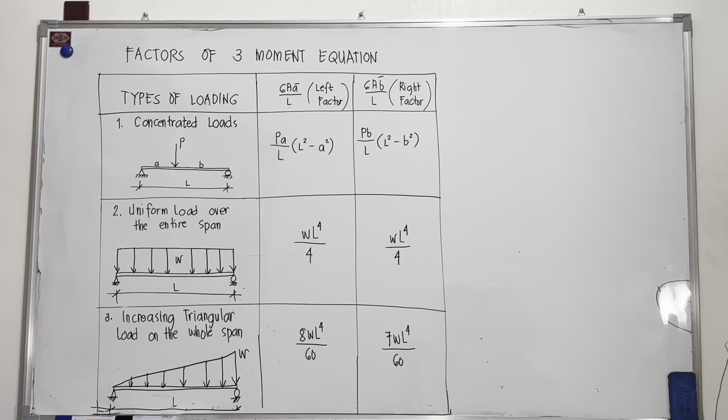So for today's topic, ang pag-uusapan natin ay ang factors of the three-moment equation. So we have the different types of loading. Tatlo lang po muna yung nandito pero sa talagang reference book, mga 6 to 7. Mamaya ipakita natin yung iba, no?

So ito lang muna tatlo yung ating mga types of loading: concentrated loads, uniform load over the entire span, and the increasing triangular load on the whole span. So for the concentrated load, meron tayong left factor na tinatawag na 6AA bar over L, at right factor na 6AB bar over L. Yung A bar represents the centroid from the left support, at yung B bar represents the centroid from the right support.

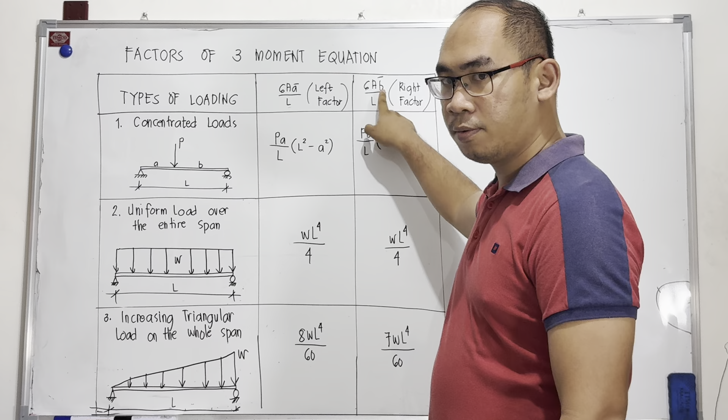So like for example, we have here the load, no? Tapos nagkaroon tayo ng ating moment diagram by parts. So let's say nagkaroon siya ng moment diagram by parts, at yan yung naging moment diagram by parts.

So kung pagka sinabi natin 6AA bar over L, lahat ng area at moment nito, yung A represents the area, yung A bar naman is moment doon sa left support. So ito yung AA bar 1, tapos ito yung magiging AA bar 2. While yung 6 naman is constant value, at yung L naman po is the length of the span.

So magtataka kayo, saan ba galing yan? Saka na natin pag-usapan kung saan galing yung mga yan. Pero isa sa pinaka kailangan kasing isolve pagka magko-compute tayo ng three-moment equation ay itong factors to the left and right. So mahalaga po na makompute yan. Kaya bago tayo pumunta dun sa tinatawag na three-moment equation, kailangan mapag-usapan muna natin ito, no?

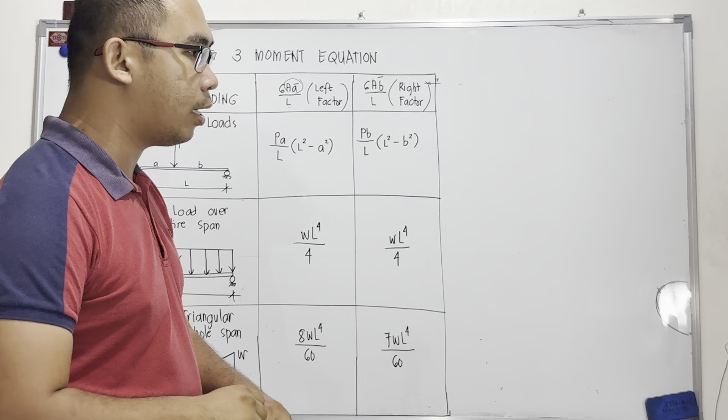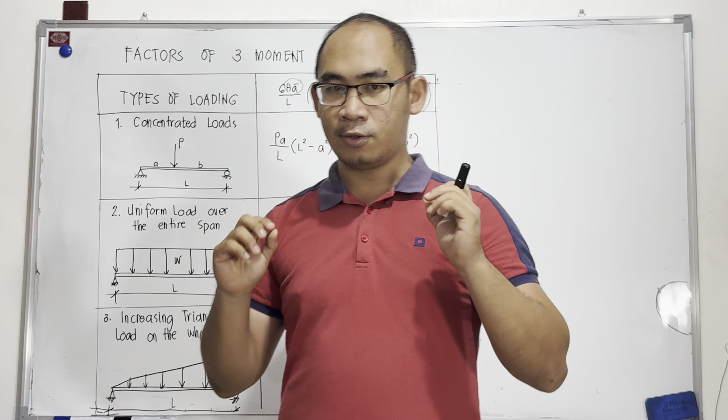So let us try to discuss what are the types of loading. So like for example, kung mapapansin niyo, lahat po ito ay simply supported. Kasi kung kahit ang loading niya ay naka-fix, ina-assume based dun sa derivation ng ating three-moment equation na dapat lahat ng support ay simply supported.

So, discuss muna natin yung concentrated loads. Let's say we have here the concentrated load number 1. If we have here concentrated load P and a distance of A and B, so meron tayong support dyan. So, what are the reactions po na meron tayo dito?

So, dito ay naka-variable siya, no? Baka kasi mamaya ay hindi kayo sanay sa mga variable. So that is PA. Pagka mag-summation of moment tayo sa A is equal to 0, that is P times A. Let's say this is RB, minus RB times the total length of the span is L, is equal to 0. So RB now is equal to PA over L.

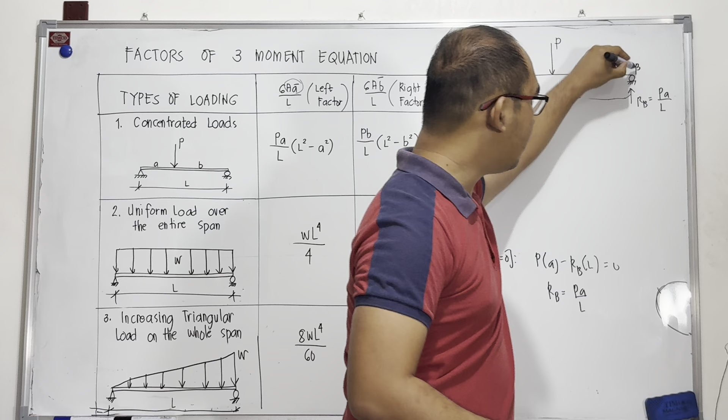While the other one naman po ay kung mag-moment naman tayo sa B, let's say this is A and this is B. Summation ng moment naman po tayo sa B is equal to 0: PB minus RA times L is equal to 0. So RA now is equal to PB over L. So those are the reactions po na mako-compute po natin.

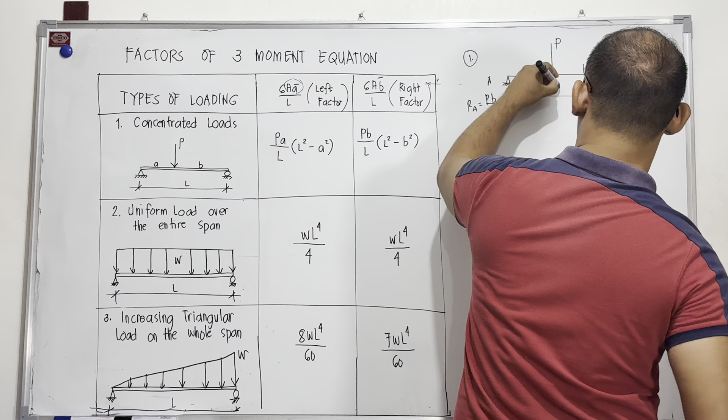Okay, so let us solve for 6AA bar over L. Parang area moment lang rin to. We have to draw first the moment diagram by parts. So let's say this is the moment diagram by parts. Tapos lagyan natin itong P. So saan tayo magpi-fix? Kung kailangan natin ay 6AA bar over L, doon na tayo mag-fix sa point A, mas madali. Kung sa A tayo mag-fix, magiging ganito po siya.

So yung ating P, multiply natin sa A para maging moment siya kung moment diagram by parts natin, so the distance here is PA. While on the other hand, ito po ay 6AA bar over L. For 6AA bar over L, sige, mamaya na yung 6AA bar. Ito ay nag-fix tayo at A. Sa taas naman po, PA over L times L, magiging PA lang rin po yan. So this is positive PA, at sa baba ay negative PA. So dapat parehas po yung quantity nito.

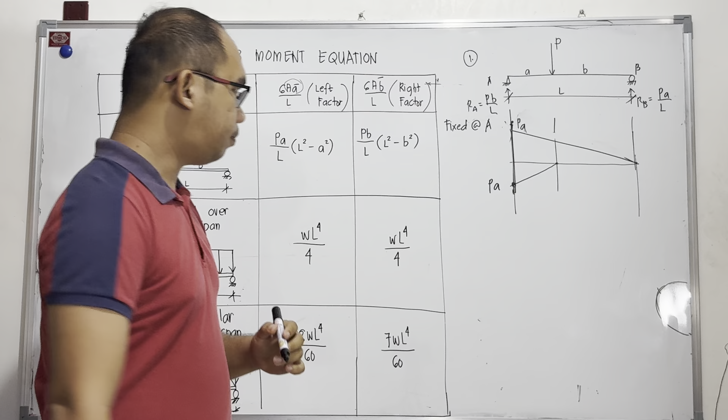Okay, so to solve for 6AA bar over L - saan ba equal yung 6AA bar over L? Paliwanag lang po natin. Ang 6AA bar over L ay equal lang rin sa 6 over the length of the span multiply by area moment with reference doon sa left support.

Saan ba ang left support? Ito po. So ibig sabihin area moment natin, sila ang reference doon sa left support. Okay, so for the first one, what is the area of this first figure? O yung nasa taas na figure. So that is 1/2 ng base times height, so PA times L over 2.

Multiply by the centroid. Ilan po yung centroid nito? Distance hanggang doon, so that is L over 3. Minus yung area naman po nung nasa baba, PA times A, so PA times A over 2, 1/2 ng base times height. Tapos yung centroid naman, mula dito papunta doon sa A, from the left support, so that is A over 3.

Okay, then let us simplify. So this 6AA bar over L will give us PA L squared over 6 minus PA cube over 6. Okay, then may mapapansin tayo, meron tayong pwedeng ma-factor. So pwede nating ma-factor ay yung PA over... PA times L over 2 times L over 3.

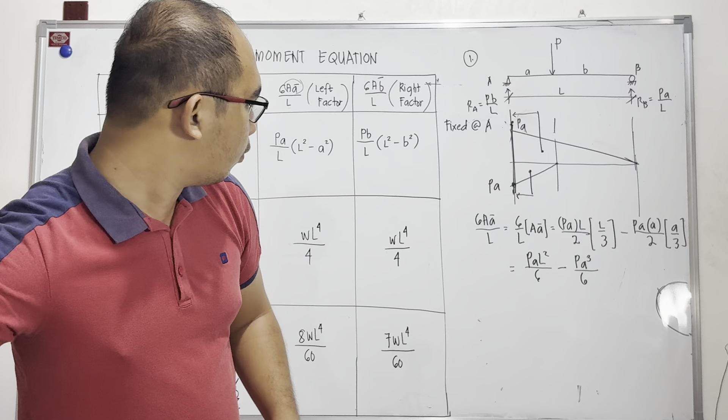Okay, sorry, meron pala tayong nakalimutan. So that is the area moment, pero nakalimutan kong ilagay yung 6 over L, no? So 6 over L, lagay po muna natin yung 6 over L dito. Yan. So 6AA bar over L, ito yung 6AA bar over L, is equal to 6 over L ng AA bar.

Kumbaga, itong value na to, yan po yung value ng area moment or yung AA bar, area moment from the left support. Yan po yun. So nakalimutan ko lang ilagay yung 6 over length ng span. Okay, so yun po yan.

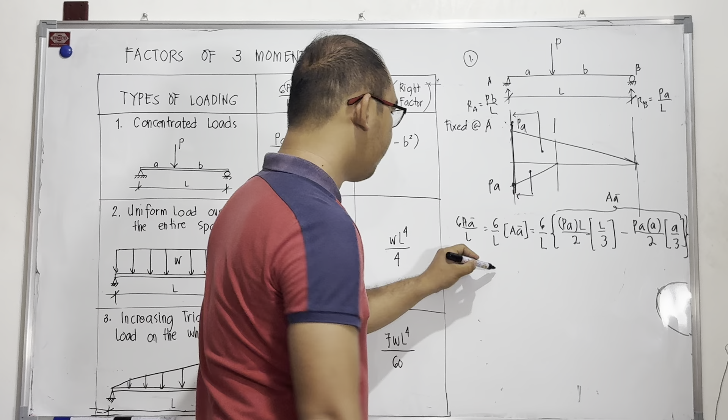So magiging, let us try to simplify. So if we are going to simplify this one, that becomes 6 over L multiply by - ano yung monomial na pwede nating i-factor. I think yung ating PA over 6, yung P common sa kanila, meron tayong P na pwedeng i-factor. Tapos yung A, pwedeng i-factor din. Over 2 times 3 becomes 6.

So that is 6, or sige, so simplify lang muna natin. PAL squared over 6 minus PA cube over 6. And simplify, so 6 over L. Ano po yung pwedeng i-factor? PA over 6 multiply by L squared minus A squared.

Okay, tapos try nating simplify, magka-cancel to. So ang matitira ay PA over L times L squared minus A squared. So ito na po yung formula para sa factors to the left nung ating concentrated load. Okay, so ganyan po yung magiging formula natin.

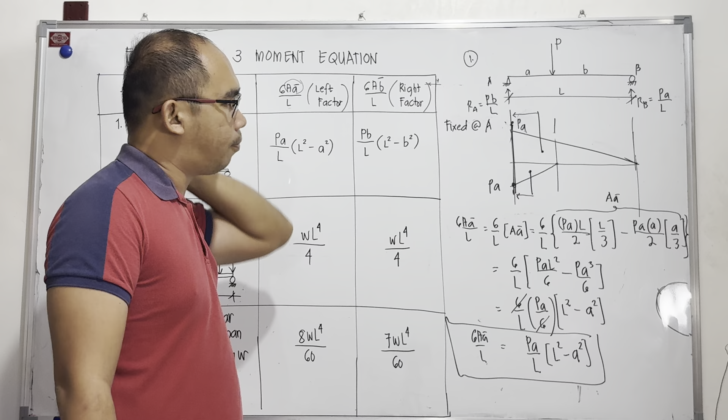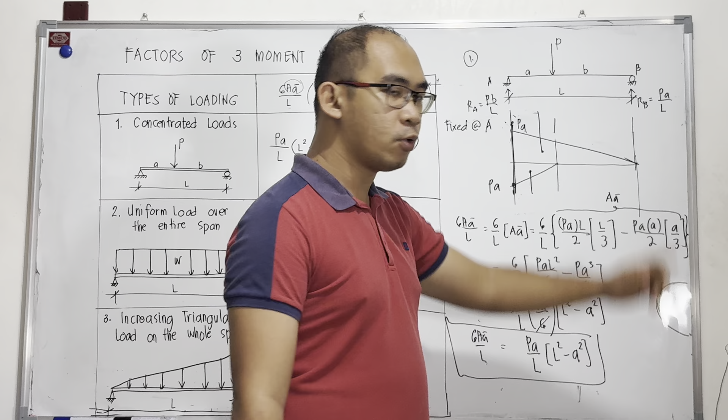So in case man, yung ating factors to the right, pwede naman na ganito pa rin yung moment diagram by parts niya. Tapos yung distance lang ng ating moment ang mapapalitan. So doon na tayo magre-reference sa right, no? You can try that, pero mas prefer ko kasi mag-change ng fix doon sa right support kasi mas madaling mag-compute pagka nandun sa right support.

So let's try the 6AB bar. So again, this is the 6AA bar over L or yung factors to the left ng ating moment ng ating factors to the left ng ating given load, no? So yan po yung given load natin. So yung factors to the left natin is yung kanina.

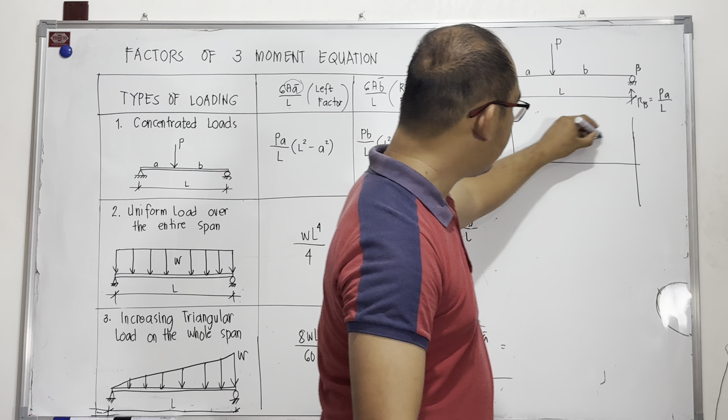So let's try naman kapag doon tayo sa right, magmo-moment or mag-fix, so this is PB. So this becomes PB over L. So ito naman ay magiging PB. Tapos ito naman po ay magiging P times B is PB.

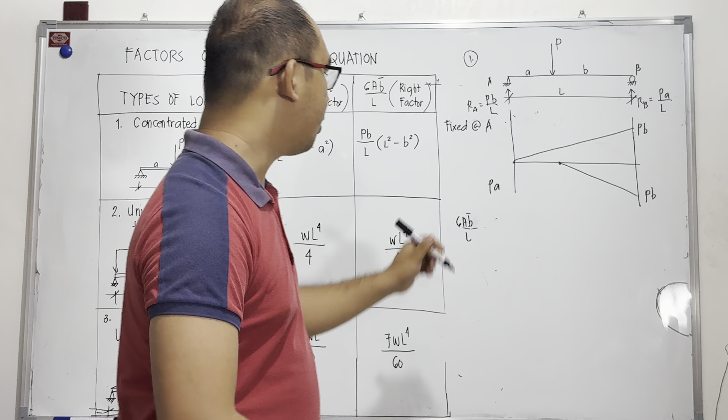Okay, so sa 6AB bar over L, may napansin ba kayo? Parang kamukha siya nung nasa una kanina. Yung A nga lang napalitan ng B. Okay, so let's try - 6 over L multiply by area moment, so area. So PB times length L over 2. Ayan po yung area niya.

Tapos mag-moment tayo ngayon dun sa B. So ano yung distance? Sa right support, so that is L over 3. Minus yung atin naman pong PB times B over 2. Sorry, so tapos multiply by B over 3. Okay, so let us try to simplify.

So PB over 6, or pwede nating i-factor ang PB over 6, times PB over 6 multiply by... So na-factor na tong mga PB, so pwede na natin, nakalabas na yan, pati yung 6 kasi 2 times 3. So ang matitira na lang ay L squared minus B squared. Okay, so to simplify that one, magka-cancel po yan. So magiging formula ay PB over L times L squared minus B squared.

Madaling mapalabas yung formula na PB over L times L squared minus B squared. Sir, pwede ba yung kaninang figure na lang tapos hindi na namin babaguhin yung distance? Yes, pwede rin naman po yun. Tapos i-simplify niya, magiging ganito lang rin yung sagot. Yung nga lang, baka mas mahaba yung solution kung hindi ka mag-change ng fix. Ito kasi, fix sa B na to. Doon na tayo sa right support nag-fix. Okay? So, you try it.

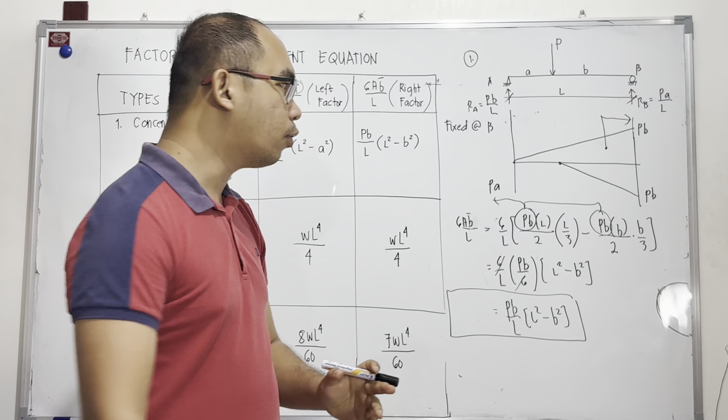Kung mapapalabas niyo itong ganitong formula pa rin, no? So meron na, ibig sabihin, napatunayan na natin yung formula na itong left factor ay PA over L times L squared minus A squared. Tapos pagdating naman sa right support, yung A lang po, mapapalitan lang siya ng B. Okay?

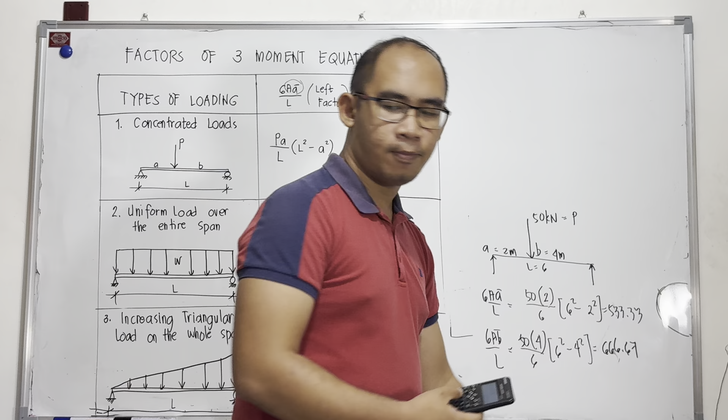ito po ay magiging 6 squared minus 2 squared. So, times 50 times 2 over 6. So, ang magiging value nito ay 533.33. Tsaka yung 50 times 4 over 6 times 6 squared minus 4 squared, so 666.67. So, yan na po yung value niya, no? Yung magiging sagot po sa ating problem pagka given tayo ng concentrated load tapos with distance A and B.

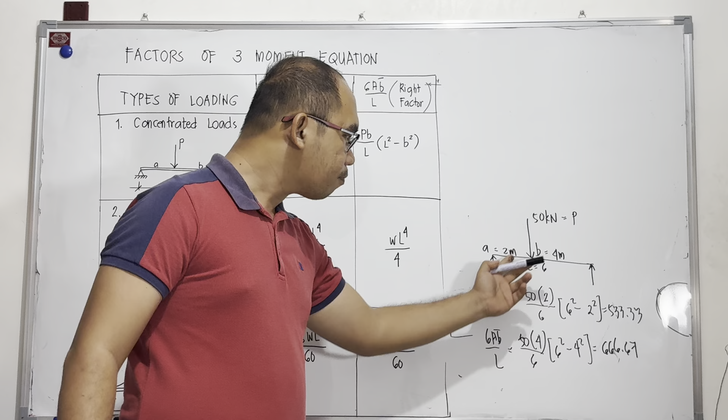Let's try to derive the another types of loading. We have the uniform load. So, paano naman po yung formula kapag yan ay uniform load W? Okay?

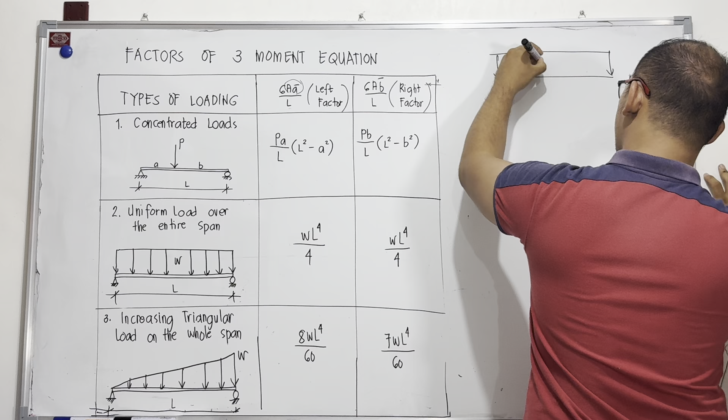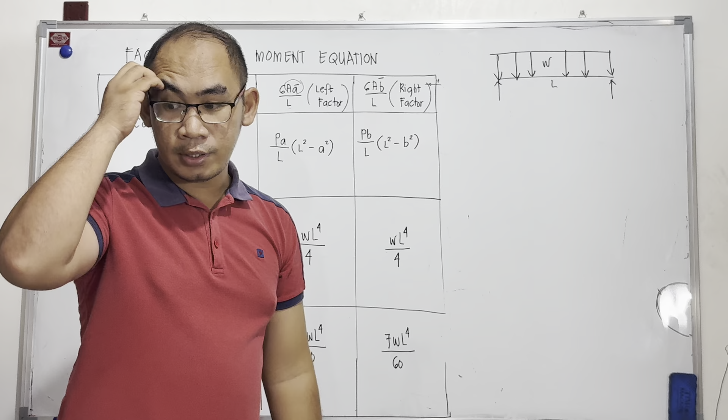So, let's try to compute the reactions. Distance L. Okay, to compute for the reactions, pwede naman yung pag-compute natin na conventional sa reactions. Pero ano ba yung area nito, or yung ating total load force? The total load force is WL. Ibig sabihin yung WL, kung yan ay symmetrical, paghahatian lang yan ng dalawang reactions—yung reaction sa left support at saka yung reaction sa right support. So, this is WL over 2.

Okay, kung gusto nyong ma-check by the conventional reactions, pwede rin po. So, summation ng moment sa A is equal to 0. So, WL times L over 2, area times moment, tapos is equal to reaction sa B times L. And so, magka-cancel lang yung L. So, reaction sa B becomes WL over 2. Yun lang rin po yun.

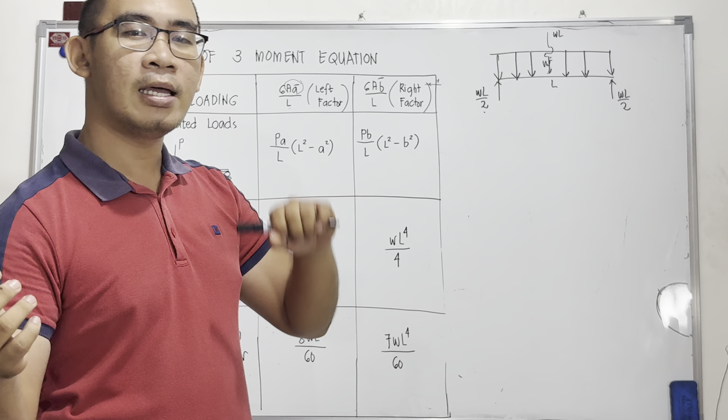No? Then, try nyo mag-moment dun sa kabila, WL over 2 lang rin po, since yan po ay symmetrical. So, meaning, kung yan ay symmetrical, ina-expect natin na yung factors to the left and right rin po niyan ay parehas rin. Yun po ang isang condition ng factors to the left and factors to the right. Once na symmetrical yung ating loading, ang kanilang factors ng left and right ay parehas lang.

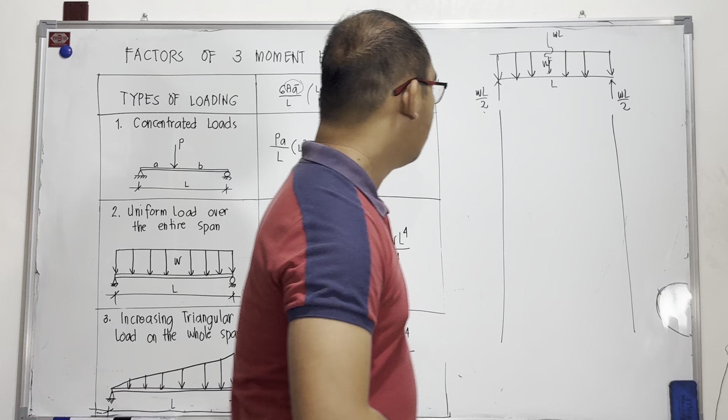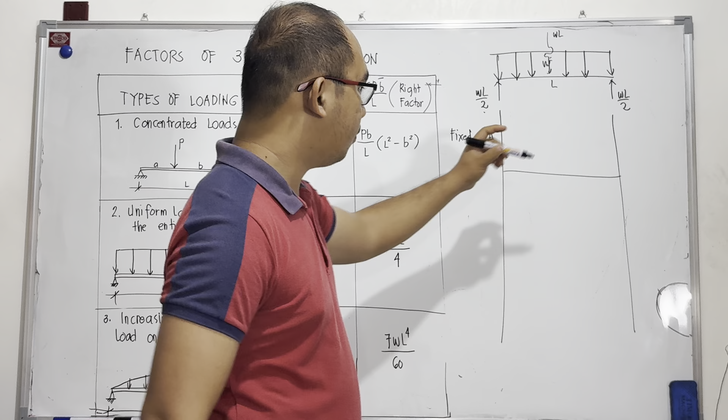Okay, so let's try to derive this formula. Okay, so let's try to fix at A. Okay, so if we're going to fix at A, yung ating concentrated load na WL over 2 or yung reaction na WL over 2 times L becomes WL squared over 2. Tapos yung atin naman pong uniform load na W ang load.

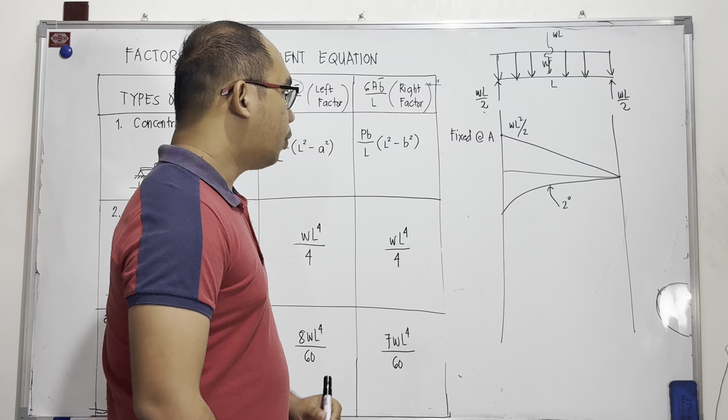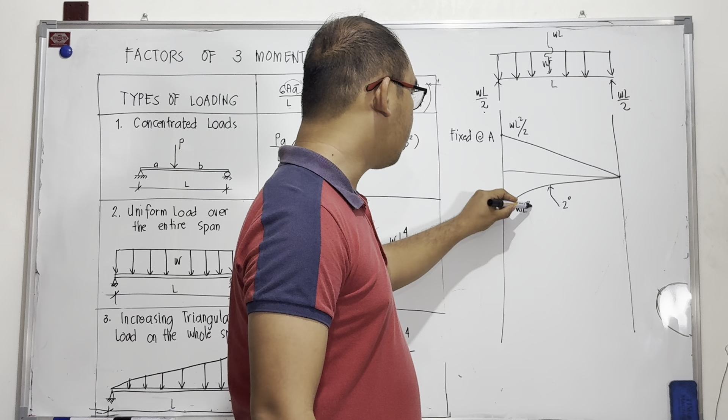So pag i-moment naman po natin yan, magiging second degree, kasi 0 degree yon, so ito na po ay magiging second degree. So what is the moment of that uniform load? WL, so that is WL times L over 2, so magiging WL squared over 2. So again, paano ito nakuha? WL times L over 2, minoment po natin yung ating uniform load. Ito naman po paano nakuha? WL over 2 multiply by the distance ng L, so magiging WL squared over 2 lang rin po.

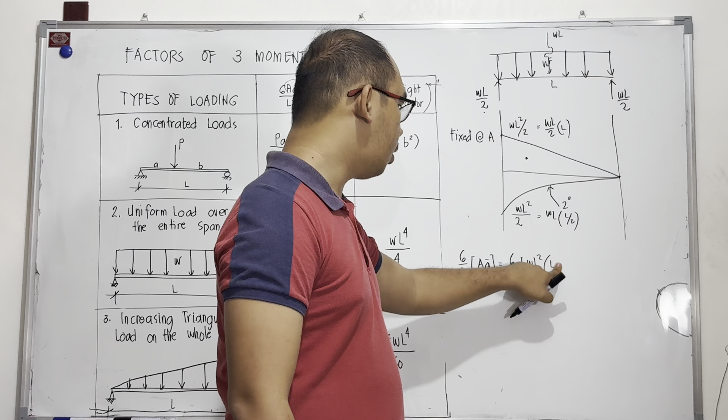Okay? So for the 6AA bar over L, or gawin na lang natin 6 over L para hindi tayo, mas madali kung ganito na lang gagawin natin, 6 over L AA bar. Okay? So dito makikita natin na kailangang ihiwalay yung length ng span multiply by the area moment from the left support. What is the area nung nasa taas? So that is WL squared over 2 multiply by the length, so that is length L.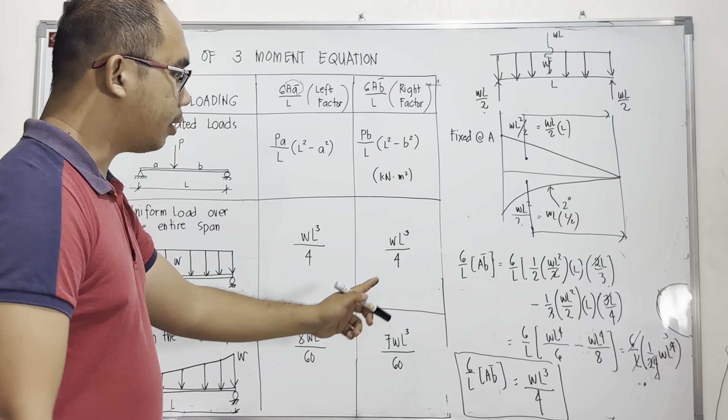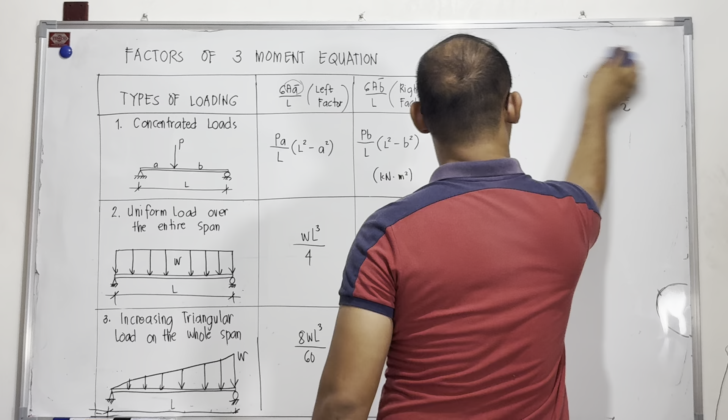So let's try to illustrate the uniform load. For example, we have a load here of 30 kN per meter. Then the length of that is 6 meters.

So to compute for the factors, we have 6AA bar over L. If we are asked to find the left factors and the right factors, it's simple, we just substitute into the formula. So 6AA bar over L is equal to WL cube over 4. This is W and this is L.

So that is 30 multiplied by the length 6 cube over 4. What would be the answer there? So 30 times 6 cube over 4 is 1620, and the unit is kilonewton meter squared. And similar for 6AB bar over L, it's also 1620 kilonewton meter squared.

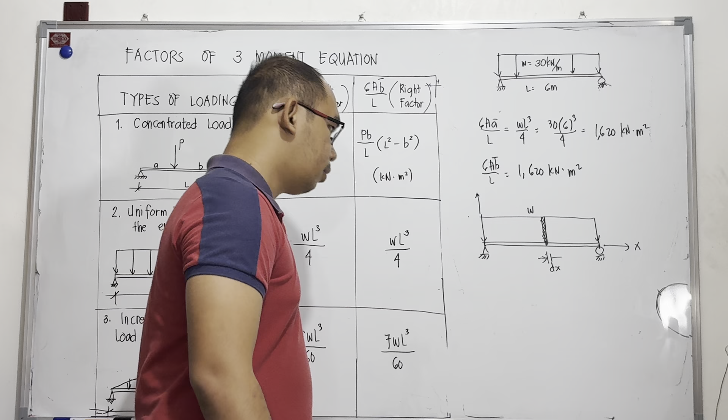So to solve the 6AA bar over L, this is a concentrated load if that is a strip. And the load of that strip, let's say that is dP. Then the height of that strip, let's say that is y. So what is the 6AA bar over L of our concentrated load like this? The formula for that is PA over L times L squared minus a squared.

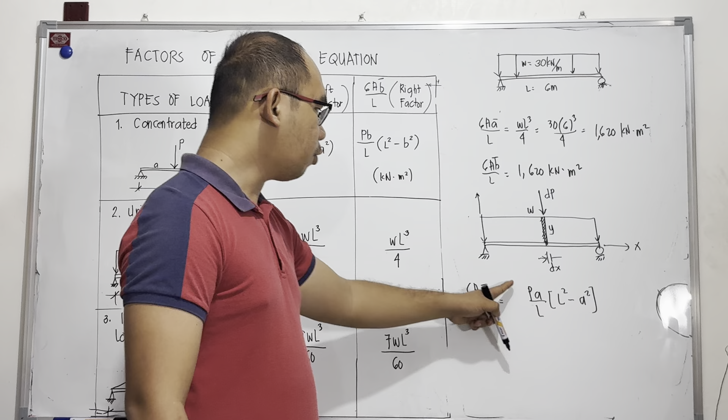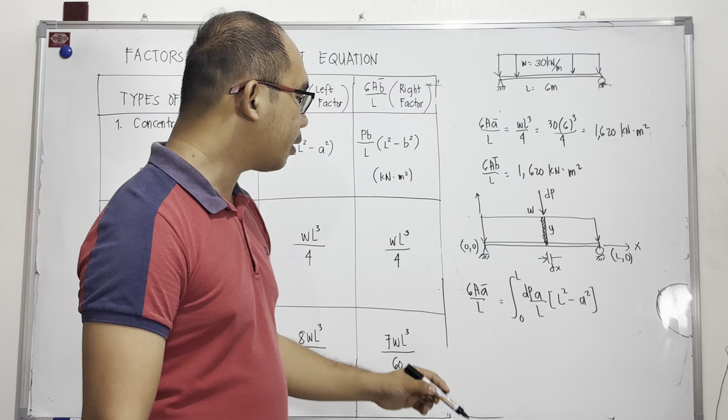So what we'll do is take the derivative of P, then integrate. Our strip will move from 0. So if we try to write the coordinate, 0,0, and this one is L,0. Distance L, but it has no y distance, so L,0. So from 0 to L, our strip should move from 0 until it reaches L. And when it reaches L, at that length, it will cover what is called the uniform load.

So here, our y is equal to what? If this is still the given, y is equal to 30 still. So that means our dp is just equal to y dx. That is the area of the strip, our dp. So the area of our strip is y multiplied by dx, and that is dp.

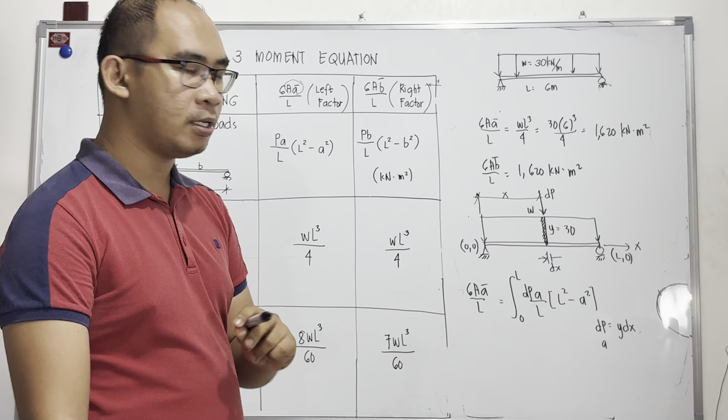So let's replace dp with y dx, and our a is the distance from the strip to the support, which is distance x. That distance is always the distance a from the support. So that is the integral from 0 to L. What is our L? 6 meters, that's still the given. So from 0 to 6, what is dp? Y times dx. Let me write the dx here. Then our a is distance x.

Sige, simplify natin na y dx. Tapos distance ng a is yung distance x. So multiply by x over the length, which is 6 multiply by 6 squared minus, ilan po yung distance ng a squared, x squared. Okay? Then simplify na lang po natin yan.

Pag sinimplify po natin yan, dito na lang natin sulat. So if you're going to simplify, yung dx ilagay na po natin doon. At saan ba equal yung y? So yung y dx po na yan ay equal sa 30. Yung y is equal to 30. Yun po yung height ng ating strip po, 30 dx. So ito ay 30 po.

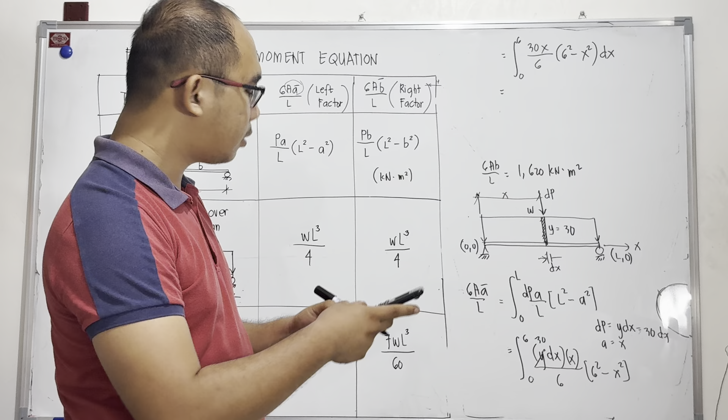So let us try to compute. Magiging 30x over 6, times 6 squared minus x squared multiplied by dx. Then the limit is from 0 to 6. So try to compute at mapapansin nyo lang rin po na yung magiging sagot niyan ay parehas lang po. So 30x over 6. Pwede naman simplify nyo yan, pero pwede rin naman pong hindi. So from 0 to 6.

Ayun, so same dun sa na-compute natin, 1620 kilonewton meter squared po yung value. Ito po ay 6AA bar over L. Ito naman ay 6AA bar. AA bar pa rin po.

Okay, so the first approach is using the formula and the second approach is using integral calculus. So this is the solution for integral calculus. So next is let's try to solve the 6AB bar.

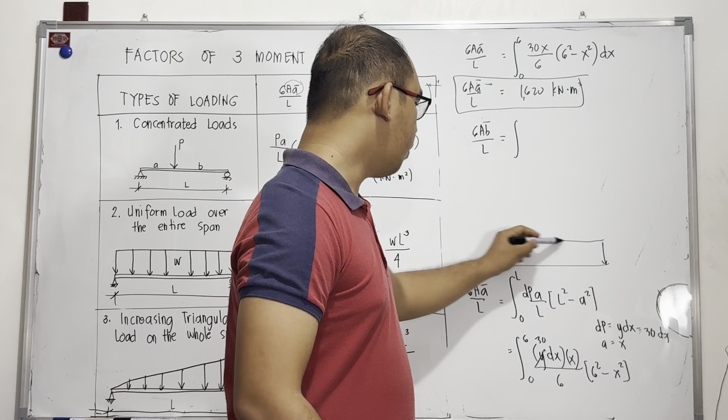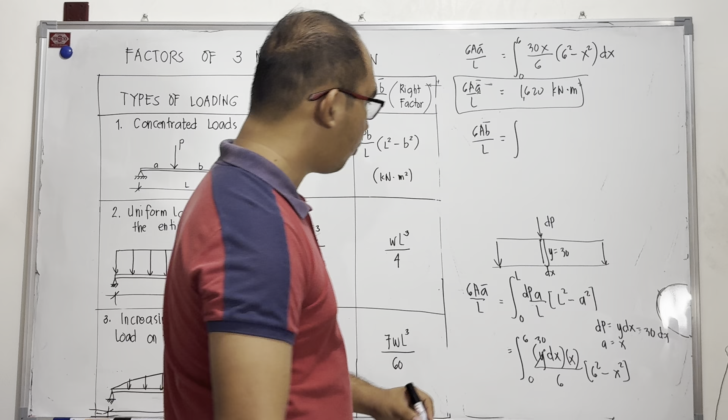Paano naman kapag 6AB bar, sir? Okay, so ang 6AB bar naman po natin dito over L is equal to 6, sige. So based doon sa figure kanina, kung meron tayo ditong dp, ito ay y which is equal to 30. Ito po ay dx. So ang dp po natin ay equal sa y dx. And yung y po natin ay equal sa 30. So 30 dx. Okay?

Kung ang a natin ay distance x, ang b naman po natin dito ay, so sabi natin so pb over l times l squared minus b squared. So kung dito ang p po natin ay dp, which is y dx, yan po ay magiging 30. Yung y natin dito is 30. Kung yung a natin ay always distance x yun dito.

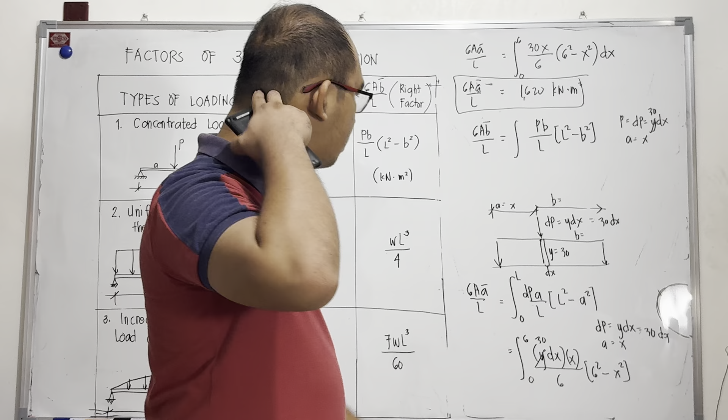So, ano naman, ito yung a. So, ano naman yung distance ng b hanggang doon? So, ang distance po ng b hanggang doon sa right support ay yun po ay that is L minus x. Okay? So, L minus x po. So, kung yan ay L minus x, palitan po natin yung b ng L minus x. Okay? So, laging ganyan po. Kung dito tayo magre-reference ng x and y, anyway, kahit saan po natin ilagay yung origin yan, pwede po.

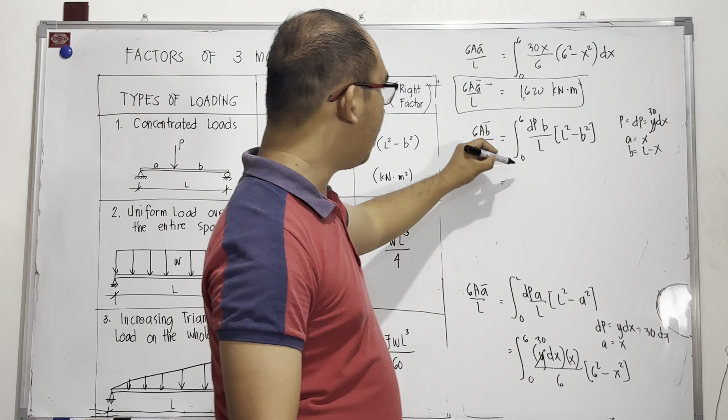Okay, again, kung yan po ay mag-integrate tayo, gawin lang po natin yung derivative of p or differential of p. So, what is now the limit? The limit is from 0 to L, which is 6. So, ang dp po natin ay equals sa 30 dx integral. Tapos, saan po equal yung b? Sa L minus x over, ilan ba yung length natin? 6.

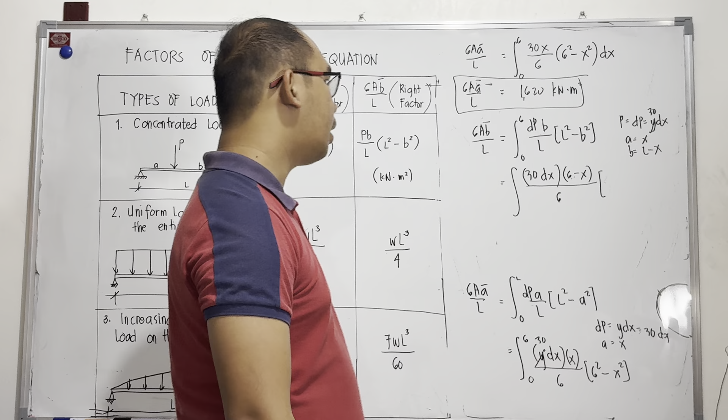Over 6 multiply by L squared. Ang L squared po natin ay 6 squared minus x squared. Okay? Then, rearrange lang po natin, no? Yung 30 dx, imbes na 30 dx yan, yung 30 dito ko na ilagay. Tapos yung dx dito ko na po ilagay sa side na to. Then the limit is from 0 to 6.

Okay. So let's try to compute. And ina-expect natin na itong sagot na to ay 1,620 rin dapat. No? So let's try. 30 over 6 times 6 minus x multiply by 6 squared minus x squared. So, from 0 to 6.

Okay. Check lang natin, no? So, dp is dp over L pb. Oh, sorry. It should be 6 minus x squared. Kasi b yan, no? So, 6 minus x squared dx. Palitan nyo rin po yung ating b ng... Lahat ng b, papalitan nyo ng 6 minus x.

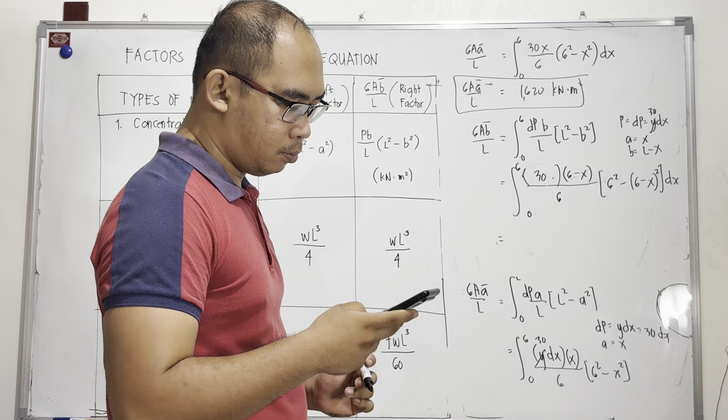Ayan, so same lang po. 1,620 kilonewton. May meter squared po yan. Meter squared. So same lang po yung magiging value ng ating 6AB bar over L. Okay?

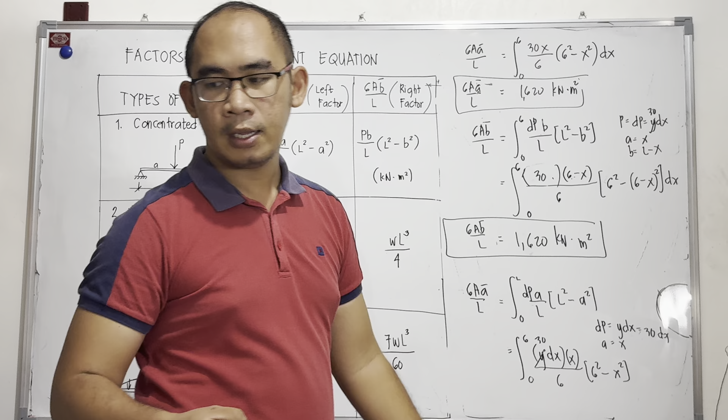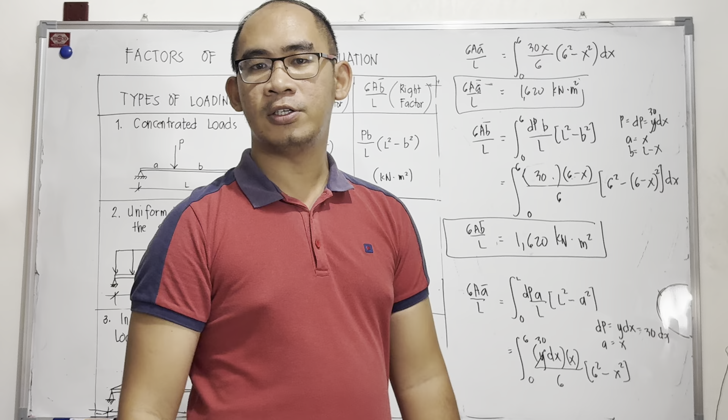So yan na po, kung sakali na ganito lang po yung mga loadings, you can use the formula or you can use the integral, no? Or kung hindi man po, ay pwede rin natin gamitin yung pinagmulan ng derivation, no? Yung ating moment diagram by parts. So itong pangatlo, iwan ko na muna sa inyo yan.

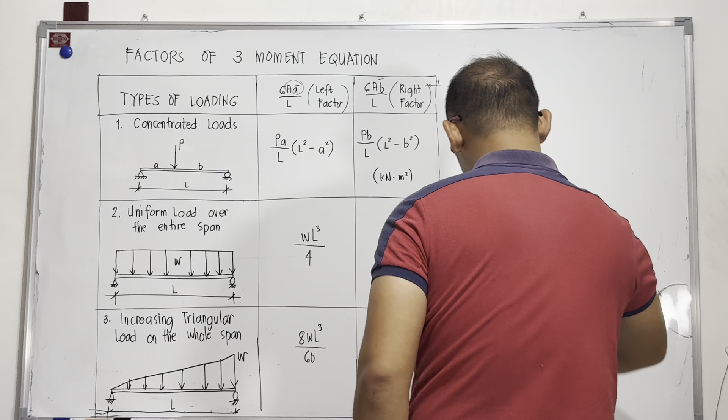You try to derive the increasing triangular load on the whole span. Huh? So, sige. Then, burahin ko lang po. So, in case man na makapagbigay ng ganyang types of loading, so, you use this formula. So, kapag mula doon sa pinaka-lowest intensity, 8 over 60 siya. Pag mula naman doon sa highest, 7 over 60 po yung formula. Okay?

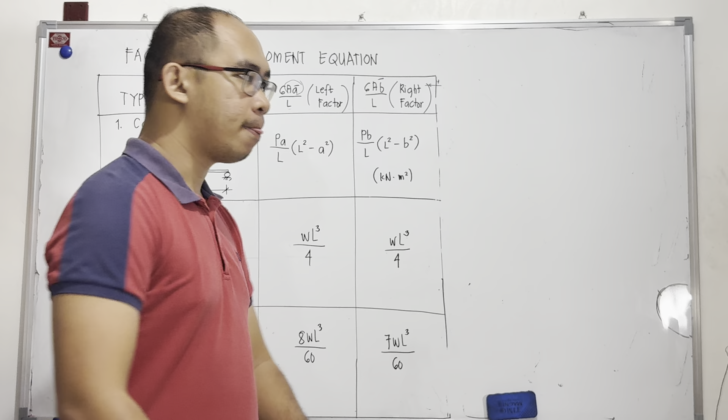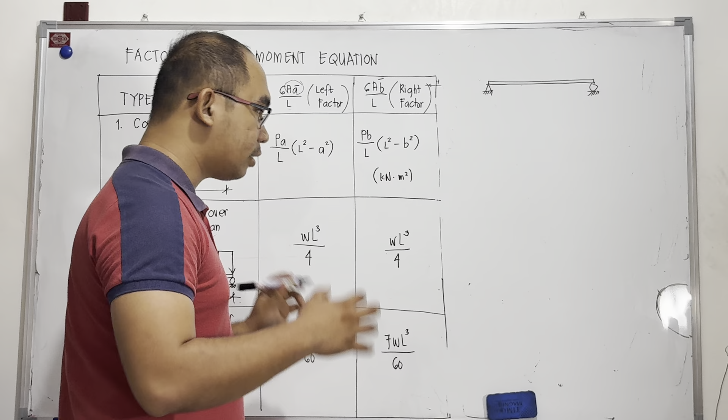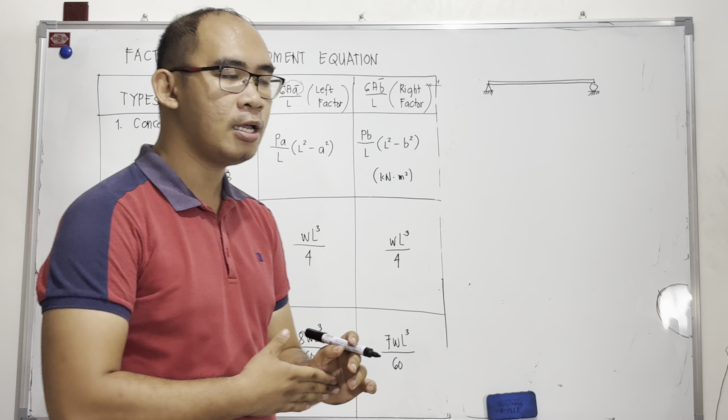So in case, paano kung hindi po nandoon sa formula yung types of loading na na-encounter ko? So wala dito sa mga formula na nandito. Okay, so paano po yung gagawin natin? So let's say ganito, we have here the types of loading na irregular, hindi siya continuous loading. So ang nangyari po ay wala siya sa formula. Okay, so ang kailangan natin gawin ay may dalawang paraan. The first one is kagaya nung pag-compute natin sa derivation, no? Nag-area moment tayo, tapos pangalawa is integral calculus. So 6AA bar over L at 6AB bar over L, solve natin yan.

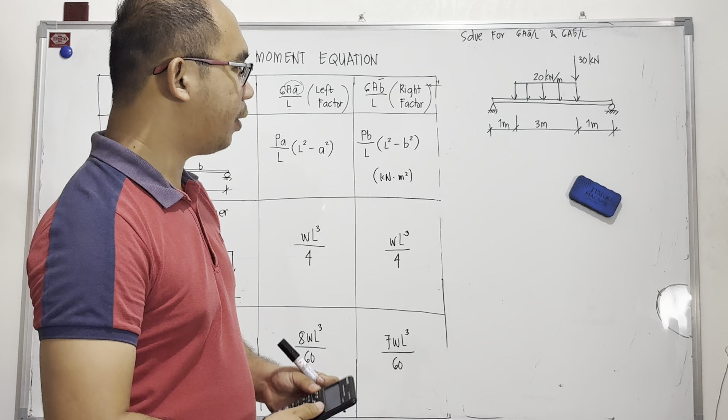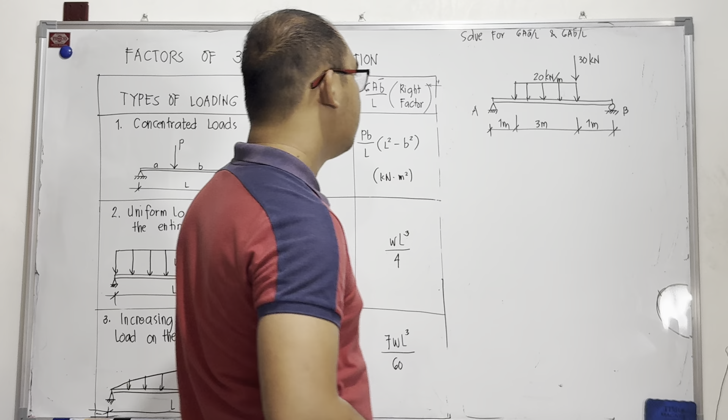So let's say meron tayong ganitong types of loading. Let's try to compute for the 6AA bar over L, medyo hindi siya kagaya ng mga formula na nandito. So what are you going to do kapag naka-encounter tayo ng ganyang problem? Okay, so let's say this is point A and this is point B. Siguro ang mas unahin kong formula na gamitin ay yung integral calculus, kasi mas madali, hindi mo na kailangan computein yung reactions, no? Tapos ibangga na lang natin doon sa mga magiging sagot mamaya.

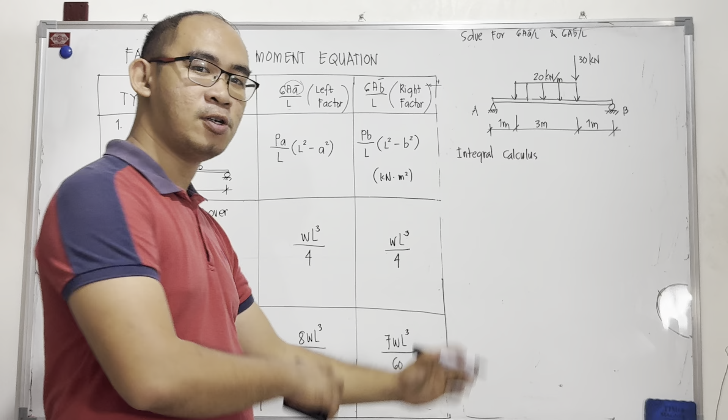So let's try using the integral calculus, area bounded by the curve. Kasi yung mga differential integral calculus, hindi natin matatakasan yan kasi yung mga application niya nandun sa mga major subjects talaga natin. So let's try to do the integral calculus. Gawa tayo ng strip kapag distributed yung load, kumbaga distributed or continuous yung load. So kung that is continuous load, this is dP, and ito, tapos ito naman po ay dx.

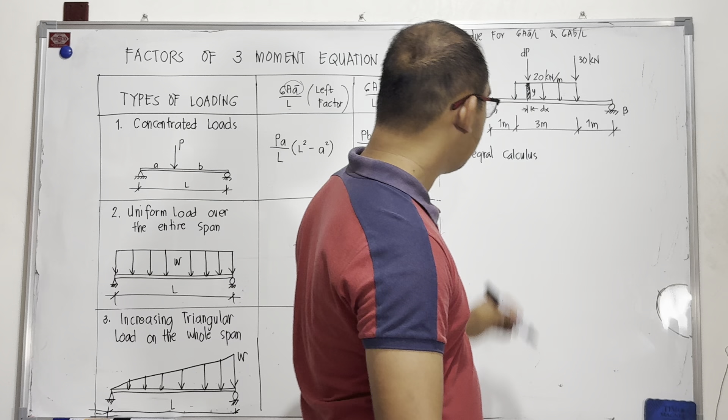So you have to compute for the 6AA bar over L. Ang dP po dito ay equal sa y dx. Saan ba equal yung y? Sa 20 lang po. Tapos yung atin naman pong A ay equal sa x lagi. Kung ito yung x-axis, consistent na lang tayo na yan yung x-axis, ito yung y-axis. So ang laging distance A niyan ay x. Ang distance B naman po ay L minus x, which is, saan ba equal yung length? 3 plus 1 plus 1, so 5 minus x.

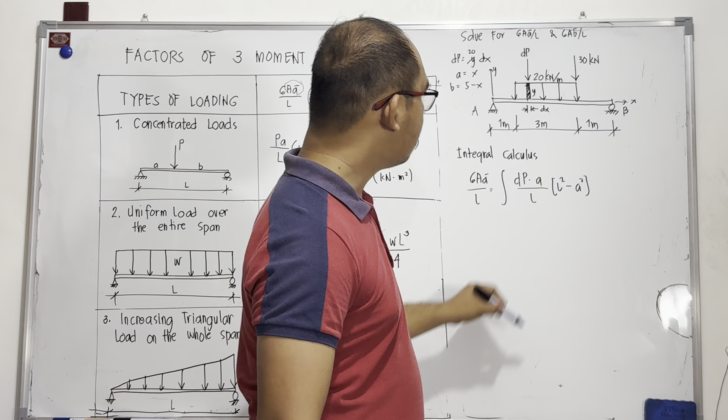Okay, so ito po, integral of dP times A over L times L squared minus x squared. Saan po ang limit? Maglalakad ang limit, hindi na from 0, from 1 to ilan po? 1 plus 3 is 4. Okay, yan ay para sa distributed load.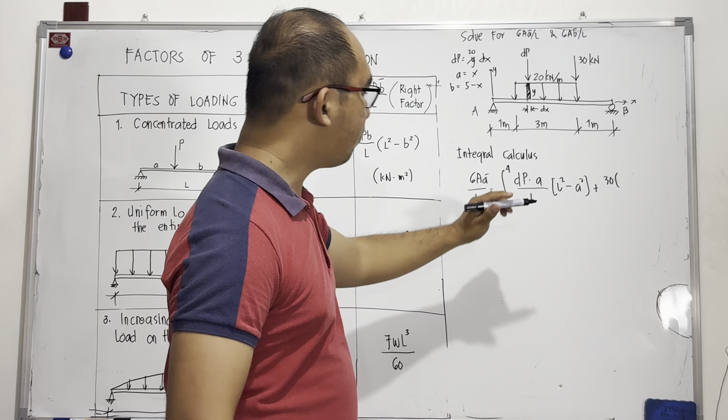Pero kailangan pa nating i-plus yung ating 30. Anong formula ng 30? 30 P A. Saan po equal yung A? 3 plus 1 is 4 over L, 3 plus 1 plus 1, so 5. Multiply by L squared minus A squared, ang A po ay 4 squared.

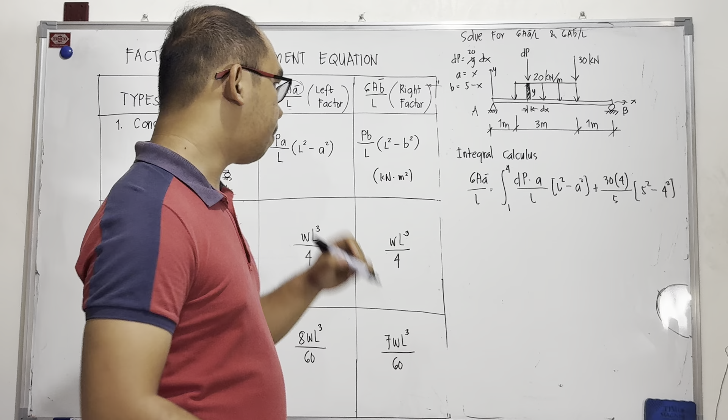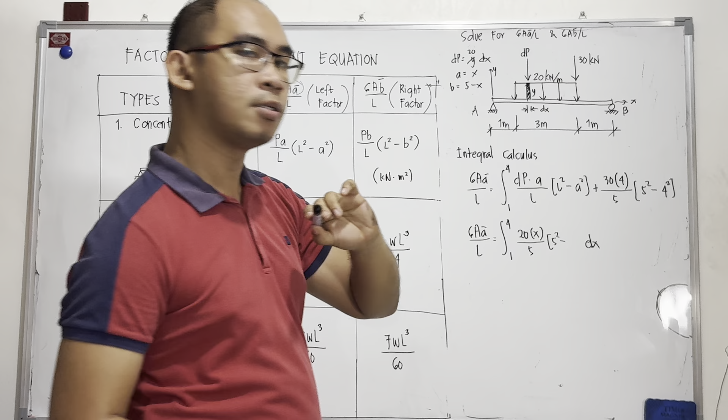Okay, so to compute 6AA bar over L is equal to the limit from 1 to 4. Saan po equal yung dP? Sa y dx, or 20 tapos dx. Lagyan, dito na natin nilagay yung dx, 20, tapos yung a, distance x, over distance ng length, 5, multiply by 5 squared minus yung distance ng a is x squared. X lang yan, siya na bahalang mag-compute kasi yung x niya ipapalakari niya from 1 lang hanggang makarating sa 4. Yun po yung kahalagahan ng boundary limits po na nandyan.

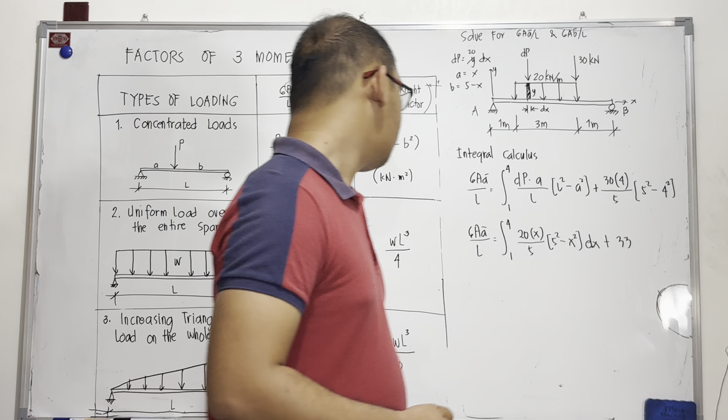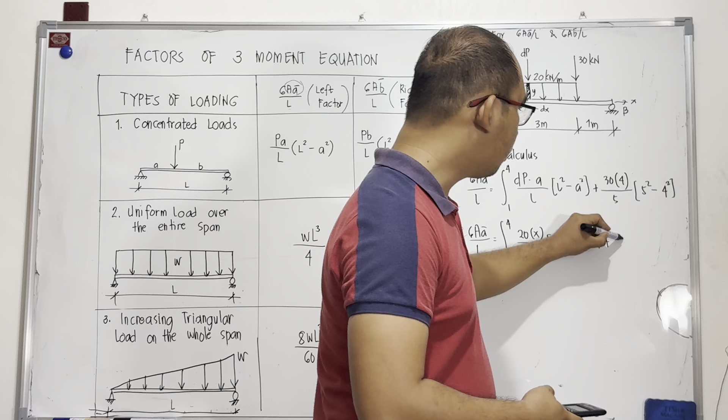Okay, plus, compute naman natin yung nasa right side, 5 squared minus 4 squared, plus 30 times 4 over 5, so 33. So 30 times 4 over 5 times... okay, try to compute, no? Iba yung 5 squared minus 4 squared times 30 times 4 over 5. 216 pala to.

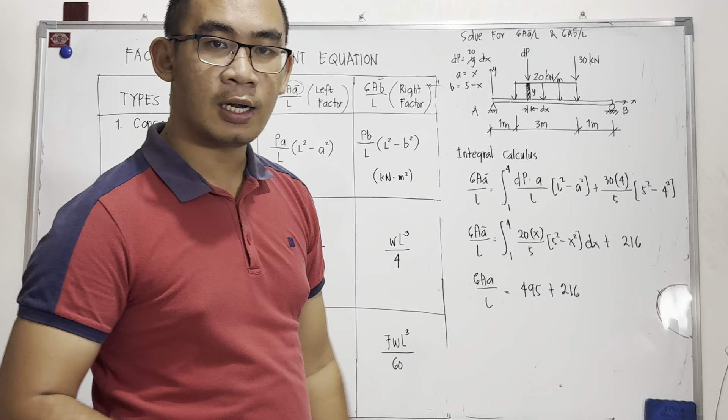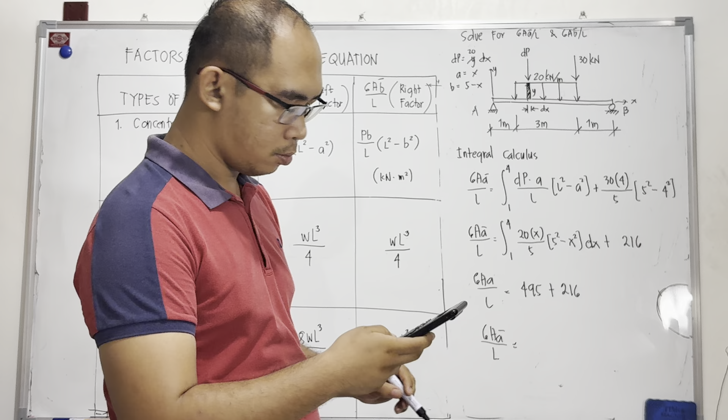Okay, try to compute this one: integral of 20x over 5 times 5 squared minus x squared, then the limit is from 1 to 4. So ang ating 6A bar over L is 495 plus 216. Pagka may concentrated load tayo, i-add lang po natin. So our 6A bar over L will give us ilan po? 711 kilonewton meter squared. So ang 6A bar over L natin dito, 711.

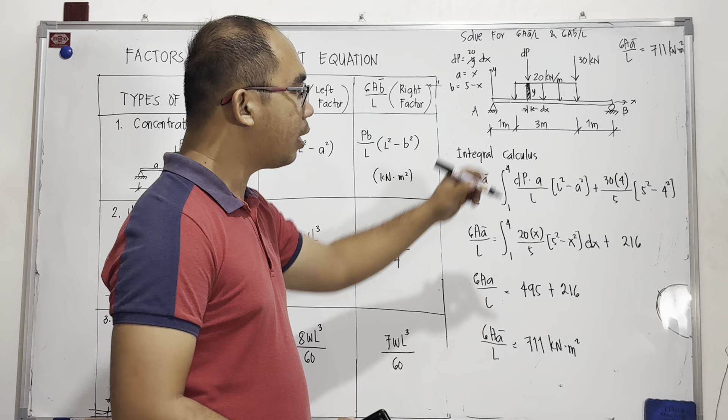Okay, how about kung yan naman po ay 6AB bar? Nilagay ko lang dito para ma-take note.